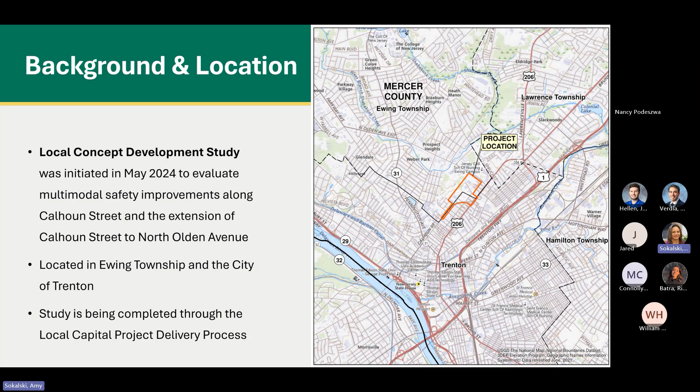So this local concept development study was initiated in May 2024. It's going to include the evaluation of multimodal and safety improvements along Calhoun Street. And it's also going to evaluate the extension of Calhoun Street to North Olden Avenue. The project's located in both Ewing and the city of Trenton, and it's being completed through the NJDOT local capital project delivery process. That allows for public input from the general public, stakeholders, and local officials to ensure the success of the project moving forward.

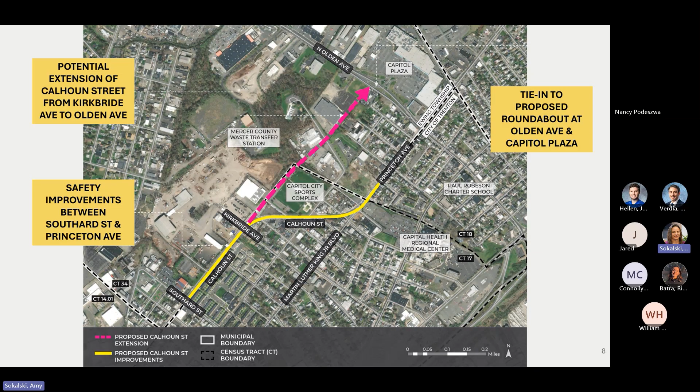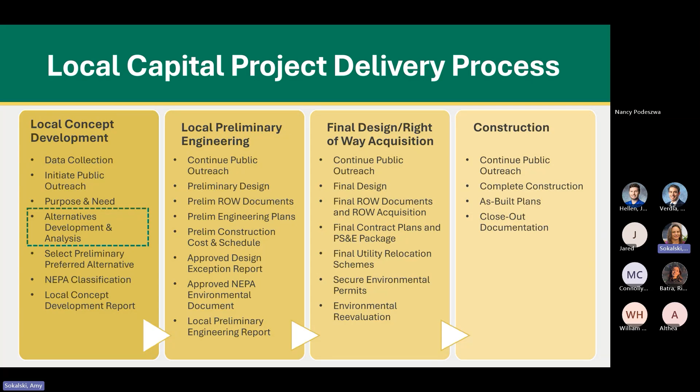As Jordan's going to discuss, we've developed 4 alternatives for the project. And then our next steps will be to analyze the alternatives, select a preliminary preferred alternative known as the PPA, and also prepare the local concept development report. Then once this phase is over, the project will move to the preliminary engineering phase, then to final design, and then finally to construction.

So now I'm just going to briefly summarize the existing conditions within the project area. Calhoun Street is classified as an urban minor arterial. It has a posted speed limit of 25 miles per hour in the project area. The road also carries 1 lane in each direction and has a daily volume of approximately 8,800 vehicles per day. There's also 2 signalized intersections within the project area, one at Southard Street and then one at Princeton Avenue and MLK Boulevard.

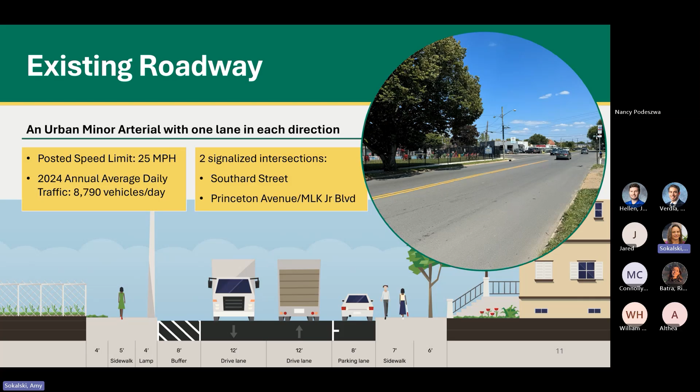So land use in the project area is a mixture of small businesses, residences, industrial properties, as well as community resources such as the Capitol City Sports Complex, churches, and then the future Paul Robeson Charter School. Capital Health Regional Medical Center is also located close by, just east of the project area. Field observations noted the presence of bicyclists and pedestrians throughout the project limits, and this traffic is anticipated to increase once the charter school opens later this year.

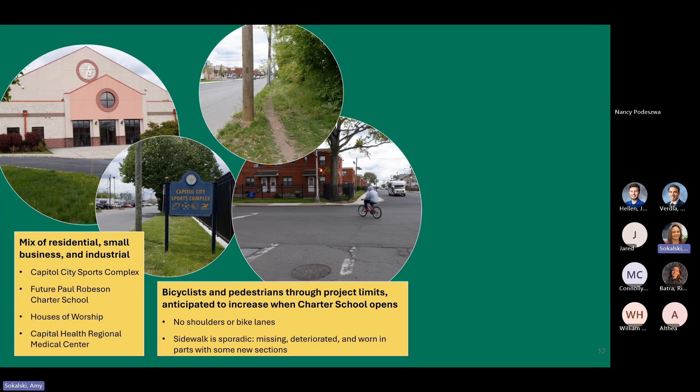Based on our traffic count data, approximately 9% of the traffic on Calhoun Street is made up of trucks, heavy trucks, buses, and a lot of them are accessing the industrial sites near Kirkbride Avenue. We've also noticed that there's a lot of on-street tractor trailer parking in that vicinity as well. There are also a few bus stops along Calhoun Street, and none of those bus stops have benches or shelters for pedestrians.

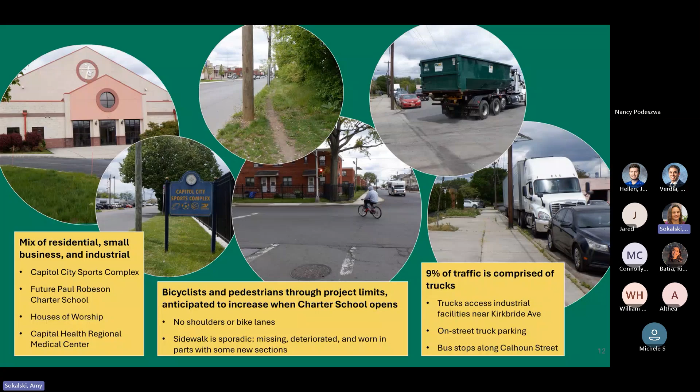At Princeton Avenue, there was 1 pedestrian crash, and then the majority of the rest of the crashes were rear end, side swipe, and angle crashes, which is pretty standard for a signalized intersection. There's also 5 crashes at Jennett Street. That's a small intersection, and 2 of them were angle crashes that were due to motorists running through stop signs. We also noticed that there was several crashes involving parked vehicles and utility poles along Calhoun Street.

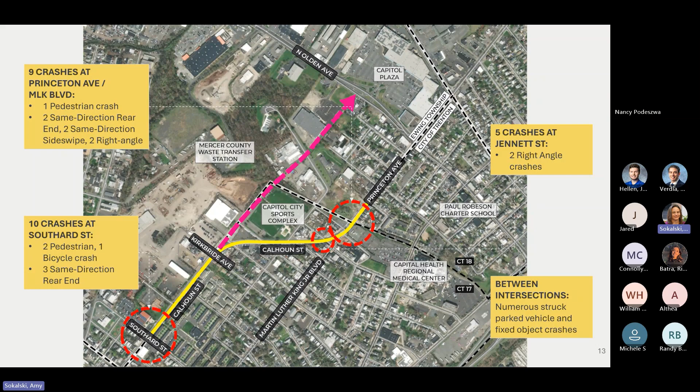So traffic counts were conducted in June 2024. There are approximately 8,800 vehicles per day on Calhoun Street. Based on the traffic analysis, the intersections operate at a level of service C or better, and that means that the traffic operations are satisfactory. It's kind of the middle of the road. We didn't notice any major operational issues or queuing in the project area either.

However, just north of the project limits is the North Olden Avenue and Princeton Avenue intersection. That intersection experiences a lot of safety concerns, including a lot of heavy truck traffic, buses, traffic congestion, and a lot of motorists running red lights there. There are also traffic signal deficiencies at the intersections of Calhoun Street and Southard Street and Princeton Avenue. Those traffic signals will be upgraded as part of this project. And then there are also a lot of substandard or missing ADA curb ramps and sidewalk that don't meet current design standards.

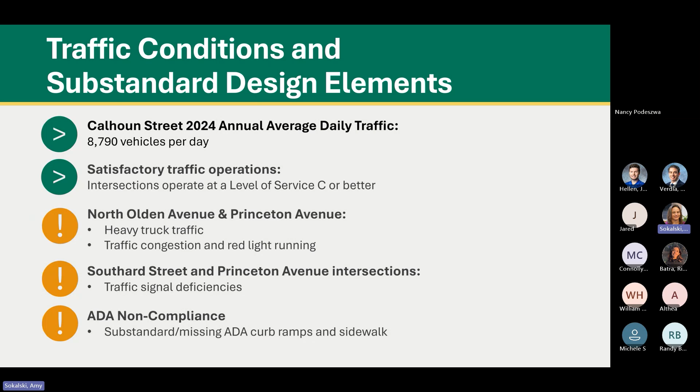I'm going to briefly touch on some environmental resources. Within the project area, there's the Boehm Porcelain Studio that's recommended eligible for listing on the National Register of Historic Places. Additionally, there's 2 Green Acres Section 4F parkland sites. One's the Capitol City Sports Complex, and the other is the Stout Avenue Playground. That's the playground located on North Olden Avenue, adjacent to the U-Haul property.

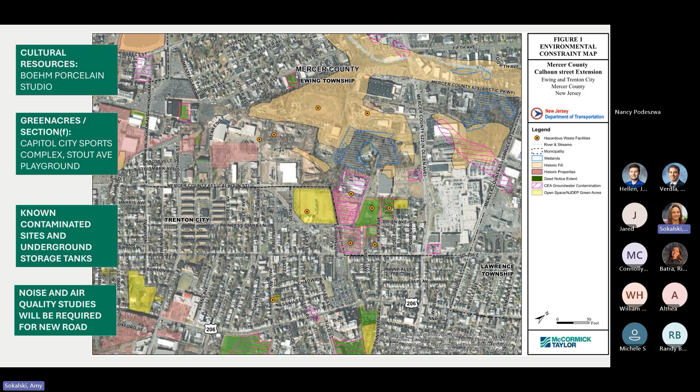There are also a few hazardous waste sites, including known contaminated sites and underground storage tanks. They're a little hard to see, but they're shown on the little orange dots on the map. So there's a few on there. And I'm just going to note too that if the Calhoun Street Extension roadway is recommended as part of the preliminary preferred alternative, we will be conducting noise and air quality studies for the new road, and those studies would be performed during the next phase of the project.

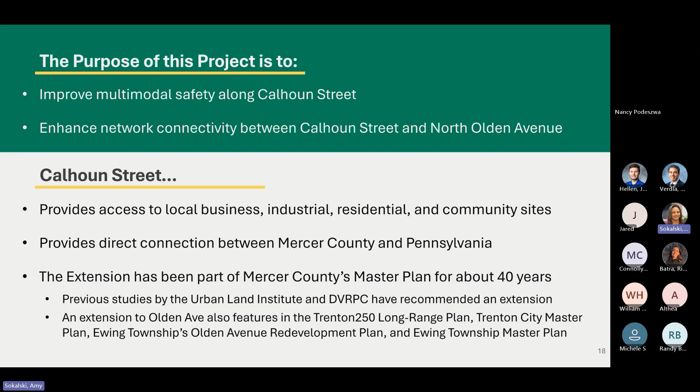So based on the results of the existing conditions analysis, the purpose of the project will be to improve multimodal safety along Calhoun Street, as well as enhance the network connectivity between Calhoun Street and North Olden Avenue. As you can see, Calhoun Street is an important roadway, provides access to a lot of local businesses, residences, industrial sites, as well as community facilities, and is an important regional direct connection between Mercer County and Pennsylvania. The Calhoun Street extension has also been part of Mercer County's master plan for about 40 years.

So bicycle and pedestrian traffic is already high and is expected to increase with the opening of the new charter school later this year. Additionally, traffic generated by the many land uses on North Olden Avenue and the lack of multimodal facilities results in a lot of conflicts between vehicles, bicycles, and pedestrians on Calhoun Street.

The Olden Avenue, Princeton Avenue intersection, although it's not part of the project limits, is directly adjacent to them, and that serves the Capital Health Regional Medical Center, which is the region's only level 2 trauma facility. And this intersection's highly congested, has a lot of heavy truck traffic, and also has a high crash rate. So the Calhoun Street extension would divert traffic away from this Princeton Avenue intersection, as well as provide safer multimodal connections between Calhoun Street and Olden Avenue.

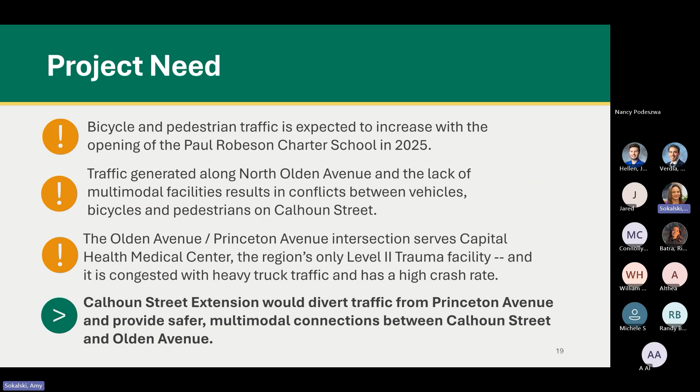Some of the goals and objectives of the project is to improve bicycle and pedestrian compatibility, improve network connectivity, and also reduce congestion in and just around the project area. The preferred alternative will also seek to implement capital improvements that are listed in both county and municipal master plans, as well as comply with local complete streets policies. We'll also be looking to minimize disruptions to adjacent properties during the construction of the project.

Okay, so I'm going to turn it over to Jordan. He's going to go through the 4 alternatives, and then he'll throw it back to me, and I'll finish up the presentation.

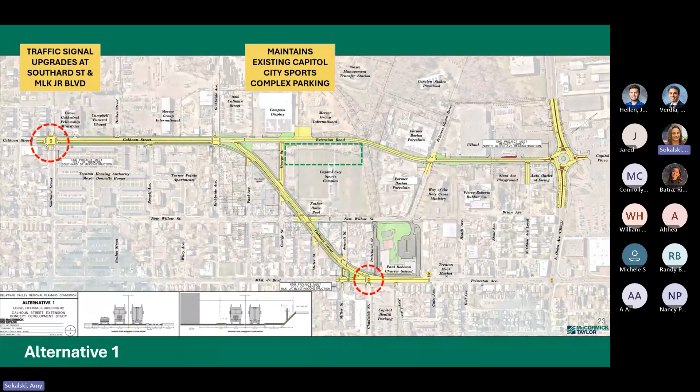So for alternative one, we will be implementing traffic signal upgrades at the intersections of Southard Street and MLK Jr. Boulevard. The construction of an extension is proposed, which we are calling Extension Road, between the existing intersection of George Street to North Olden Avenue near Capitol Plaza. This alternative's extension will maintain the Capitol City Sports Complex parking lot. Right-of-way and access impacts to the surrounding business properties will result due to the extension.

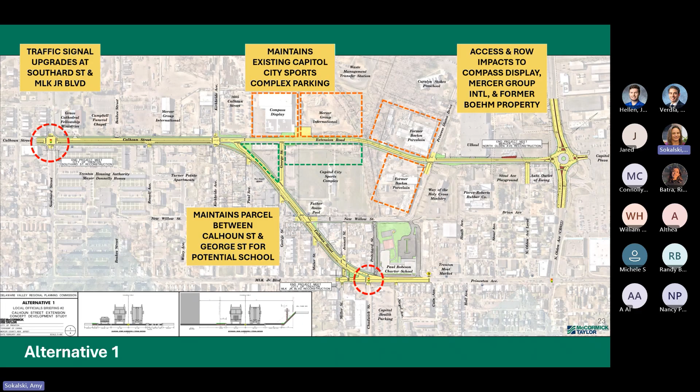Block 9307, Lot 1, which is right here next to Capitol City Sports Complex, that property will be preserved in this alternative for a potential school location. The construction of sidewalks are proposed on Calhoun Street and New Willow Street in each of the alternatives, and this will be for charter school utilization. And lastly, we will be providing high visibility crosswalks at all intersections in each alternative within the project limits.

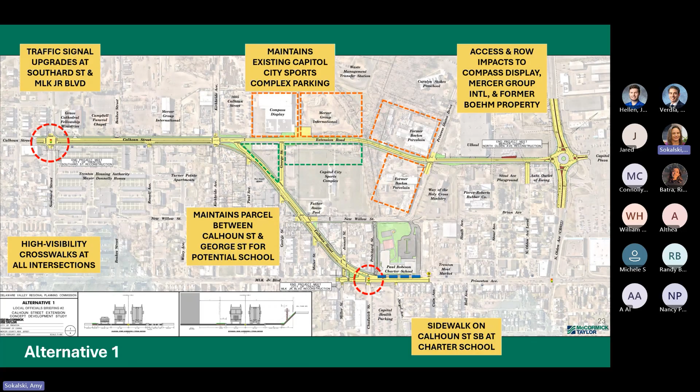Alternative 1 maintains the existing curb lines and reduces the lanes to 11 feet on Calhoun Street. The construction of buffered 5-foot sidewalk is proposed in the southbound direction, where it currently does not exist. The 7-foot sidewalk in the northbound direction will be maintained, and 8 feet on-street parking is proposed in the southbound direction. The construction of a buffered cycle track is proposed, which follows Calhoun Street's existing northbound curb line and terminates at MLK Jr. Boulevard.

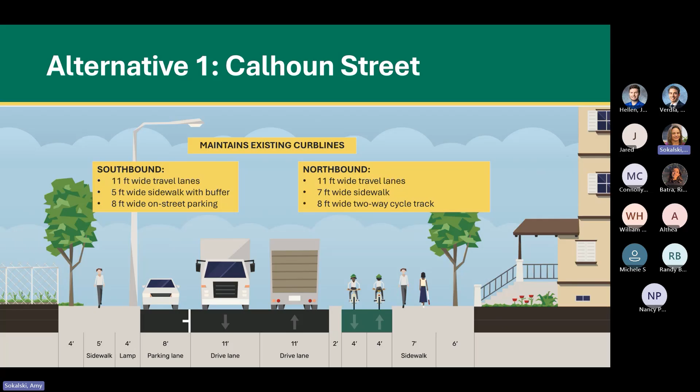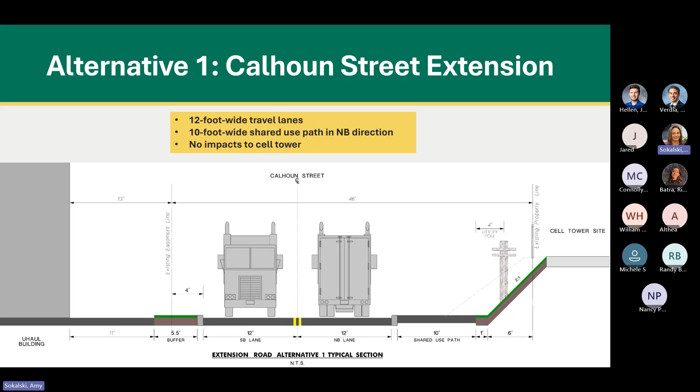Extension Road will be constrained by multiple properties, access points, and existing features along the length of its limits. For Alternative 1's extension, we are proposing the construction of 12-foot lanes and a 10-foot shared use path in the northbound direction.

The construction of an extension is proposed within the same limits as Alternative 1, and access and right-of-way impacts to the surrounding business properties will result due to the extension and the roundabout at Paul Avenue. The construction of a shared access driveway roundabout leg is proposed to mitigate these access impacts.

Impacts to Capitol City Sports Complex parking lot will also result due to the extension and roundabout at Paul Avenue. The construction of a one-way diagonal parking lot is proposed between Capitol City Sports Complex and the former Boehm Porcelain properties to alleviate these impacts. And we will be implementing traffic signal upgrades at the intersection of Southard Street, and high visibility crosswalks will be provided at all other intersections.

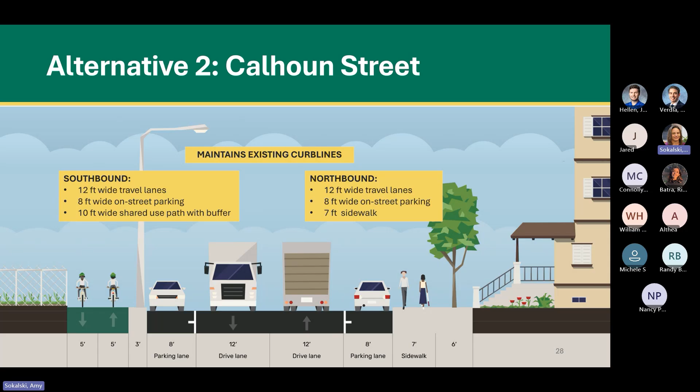Alternative 2's extension proposes the construction of 12-foot lanes with 3-foot shoulders and a buffered 10-foot shared use path in the northbound direction. The construction of a retaining wall will be required to avoid impacts to the existing cell tower adjacent to the U-Haul property.

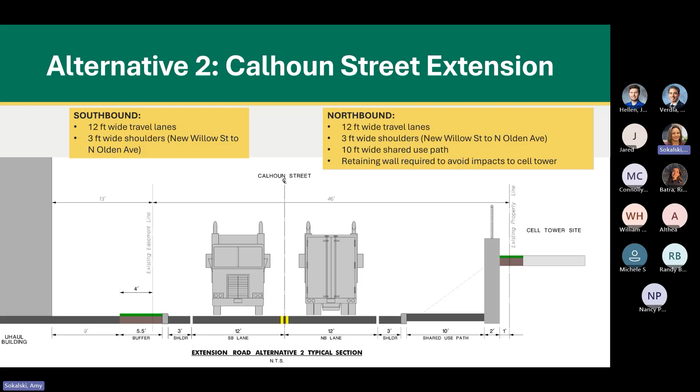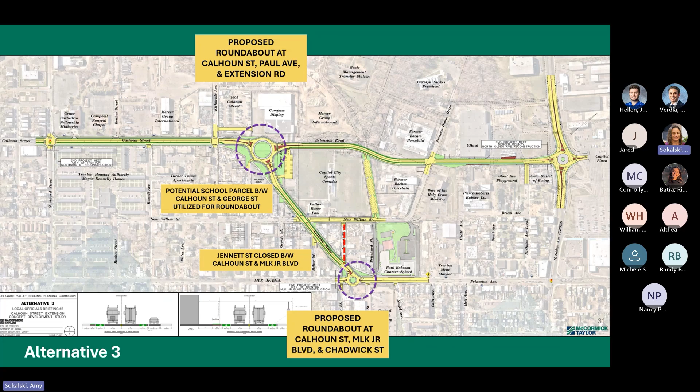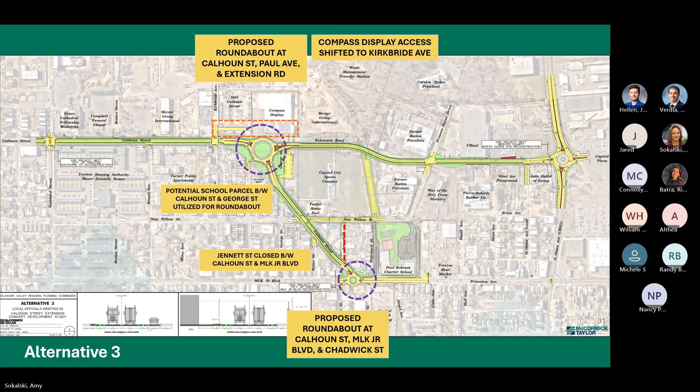For Alternative 3, the construction of a roundabout is proposed at the intersection of Paul Avenue. The potential school property will be required for this roundabout. Jennett Street will be converted to one-way and removed between Calhoun Street and MLK Jr. Boulevard to accommodate the construction of a second roundabout at the intersection of MLK Jr. Boulevard. The construction of a shared driveway to Kirkbride Avenue is proposed for Compass Display and Mercer Group International to mitigate access impacts resulting from the roundabout at Paul Avenue.

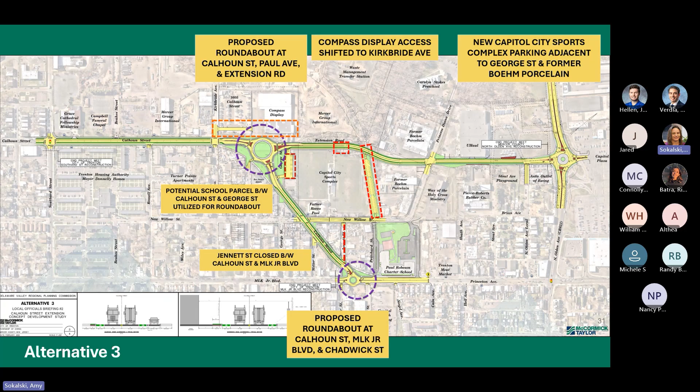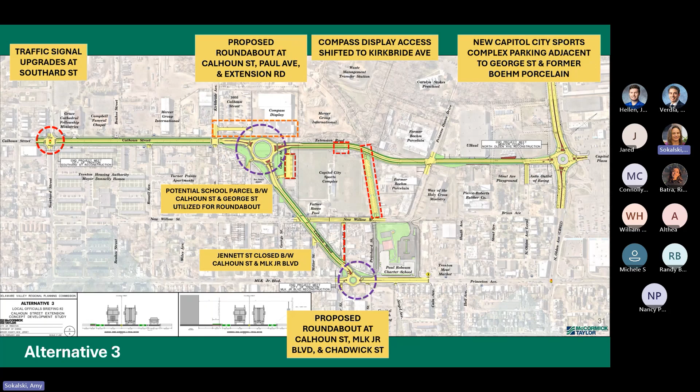The construction of an extension shifted slightly east is proposed within the same limits as the previous two alternatives. The construction of the one-way diagonal parking lot described in the previous alternative is proposed to alleviate impacts to Capitol City Sports Complex parking lot. We will be implementing traffic signal upgrades at the intersection of Southard Street, and high visibility crosswalks will be provided at all intersections.

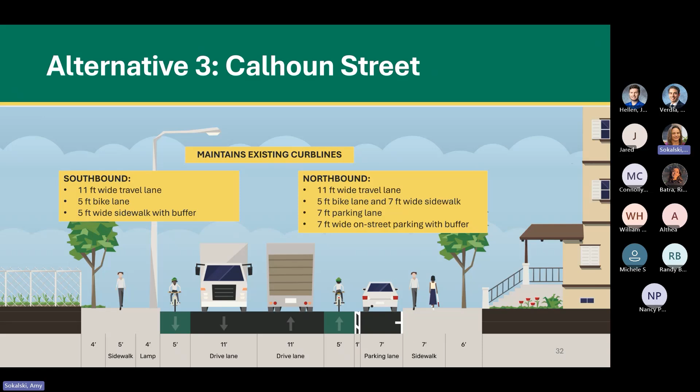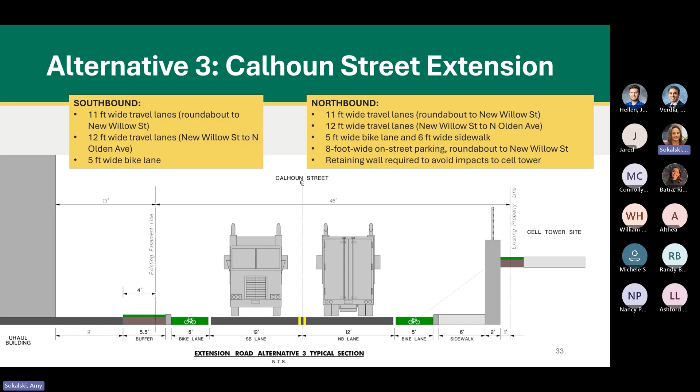Alternative 3's extension proposes the construction of 11-foot lanes from the roundabout at Paul Avenue to New Willow Street and 12-foot lanes from New Willow Street to North Olden Avenue. The construction of 5-foot on-street bike lanes in each direction and buffered sidewalk in the northbound direction are proposed along the entire length of the extension. The construction of 8 feet on-street parking is proposed in the northbound direction from the roundabout at Paul Avenue to New Willow Street. A retaining wall will also be required in this alternative to mitigate impacts to the existing cell tower near the U-Haul property.

For alternative 4, the construction of a roundabout is proposed at the intersection of New Willow Street and Paul Avenue. Calhoun Street will be removed between Kirkbride Avenue and New Willow Street. Jennett Street will be converted to one-way and removed between MLK Junior Boulevard and Calhoun Street to accommodate redesigning the intersection at MLK Junior Boulevard to a signalized T intersection.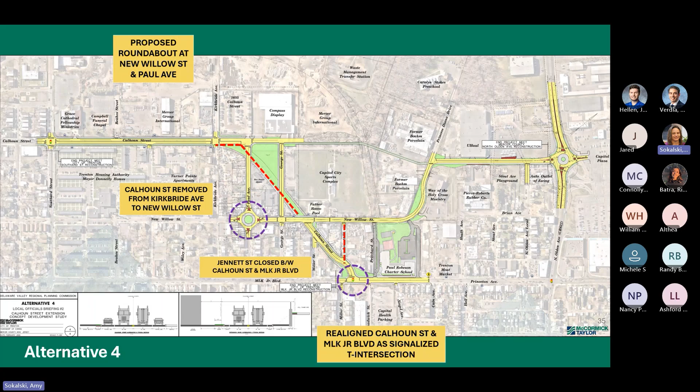The potential school property will be preserved in this alternative, and the construction of a 10-foot shared use path is proposed along the previous alternative's extension road alignment. This shared use path will maintain the Capitol City Sports Complex parking lot and avoid surrounding business access and property impacts triggered by the previous alternative's extensions. New Willow Street will be redesigned and provide connections to North Olden Avenue, utilizing a proposed extension by the U-Haul property.

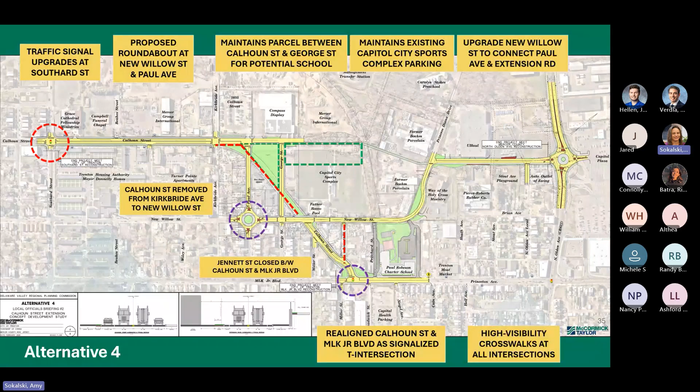We will be implementing traffic signal upgrades at the intersection of Southard Street and providing high visibility crosswalks at all remaining intersections. Alternative 4 maintains the existing curb lines and 12-foot lanes on Calhoun Street. 8-foot on-street parking is proposed in each direction, and the construction of a buffered 10-foot shared use path is proposed in the southbound direction. The 7-foot sidewalk in the northbound direction will be maintained, and as mentioned, Calhoun Street will be removed between Kirkbride Avenue and New Willow Street.

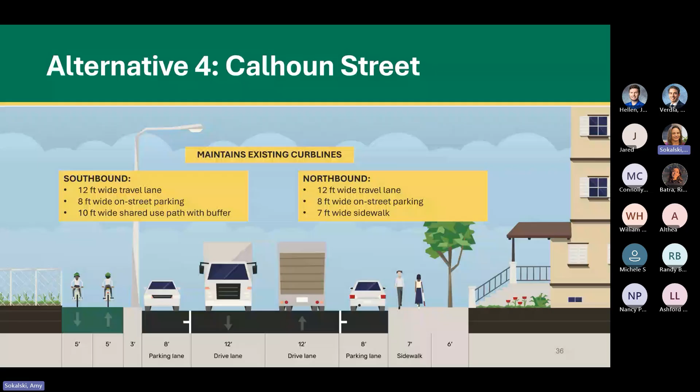Alternative 4's extension utilizes the same alignment and cross-section as Alternative 2's extension road between New Willow Street and North Olden Avenue. The construction of 12-foot lanes with 3-foot shoulders and a 10-foot shared use path in the northbound direction is proposed. And the retaining wall will also be required in this alternative as well to avoid impacts to the existing cell tower near the U-Haul property.

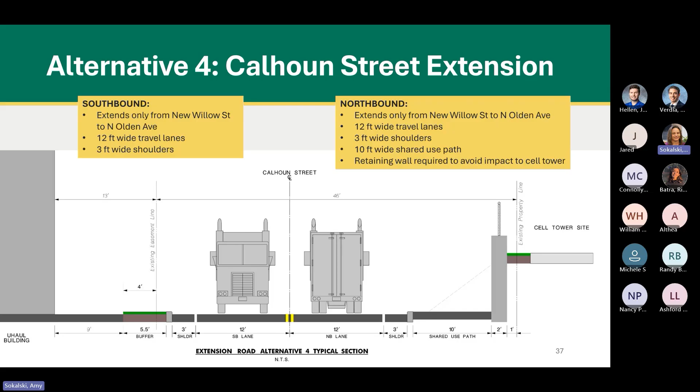So for New Willow Street and Alternative 4, we are proposing redesigning New Willow Street, and we will be maintaining the existing curb line and existing roadway cross section from Calhoun Street to the charter school. The construction of 12-foot lanes with 3-foot shoulders are proposed from the charter school to Extension Road by the U-Haul property. The construction of 7-foot sidewalk is proposed in the northbound direction from Calhoun Street to Extension Road. And Way of the Holy Cross Ministries property will be impacted to accommodate a more standard roadway curve radius, while also avoiding impacts to the existing former Boehm Porcelain building line.

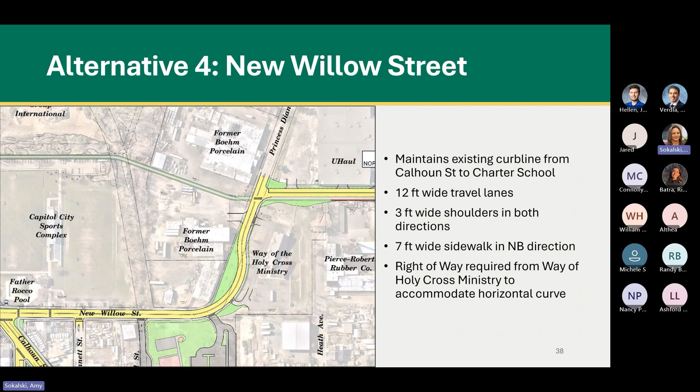So I know that that was a lot, but I thank you all for your time. As I mentioned, we're looking forward to hearing all of your comments and suggestions. But for now, I'll be turning the meeting back over to Amy. Thanks. Yeah, I just have a couple slides left, and then, if there's any questions about the alternatives, we can go back and discuss them from there. So,

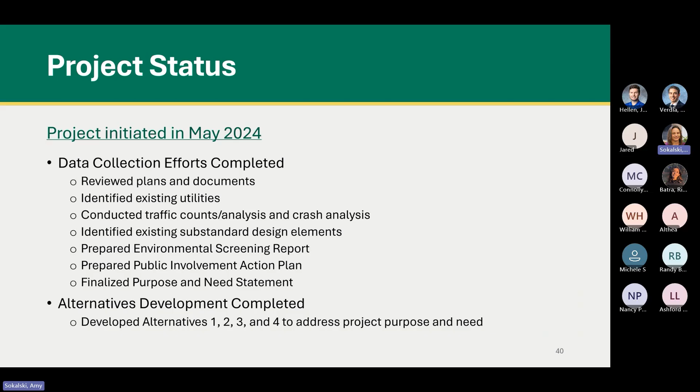Okay, so this project was initiated in May 2024. We've completed all the data collection efforts that included preparing the environmental screening report, public involvement action plan, and finalizing the project purpose and need statement. We've also developed the 4 alternatives to address the project purpose and need. So the project's on approximately a 12-month schedule. So we're looking to select a preliminary preferred alternative in the late spring of this year, early summer, and also complete the concept development phase in summer of 2025.

So I wanted to thank everybody for their time. And now we will open the floor to questions. There's also display boards up there as well. So if you wanted to go up and take a closer look at the plans, please feel free. And then Rudy is going to address any questions we might have in the chat if anybody has any specific questions in there. Oh, hi, Sunny.